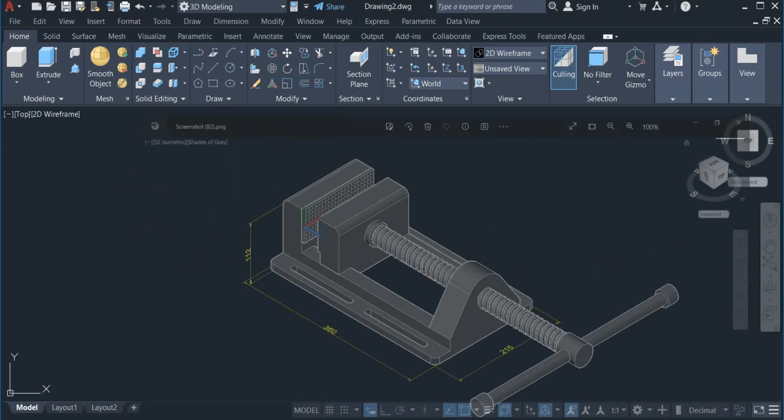Now I'll have to set up my drawing unit first. So I type U and choose units. From the drop down window I'm going to choose the length type, which is decimal, already there. On the precision I'm going to choose 0. The insertion scale I'm going to choose millimeters. On angle type, decimal degrees is already there, then precision 0. So that's going to be okay for this setup.

Click OK. And again I'm going to choose my workspace, and here I'm going to choose 3D modeling workspace, and I'm going to also choose the southeast isometric view.

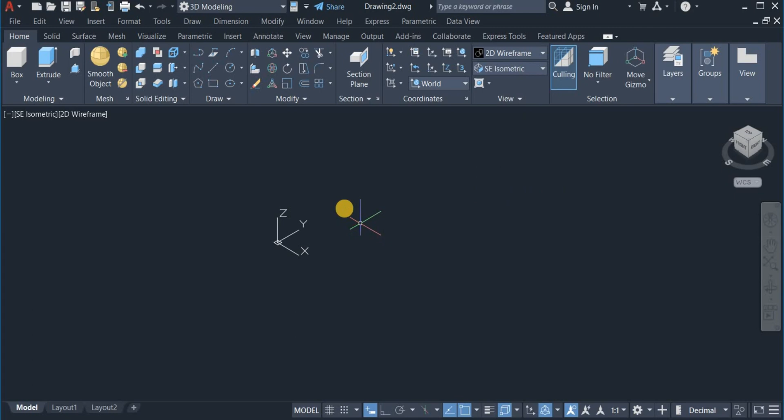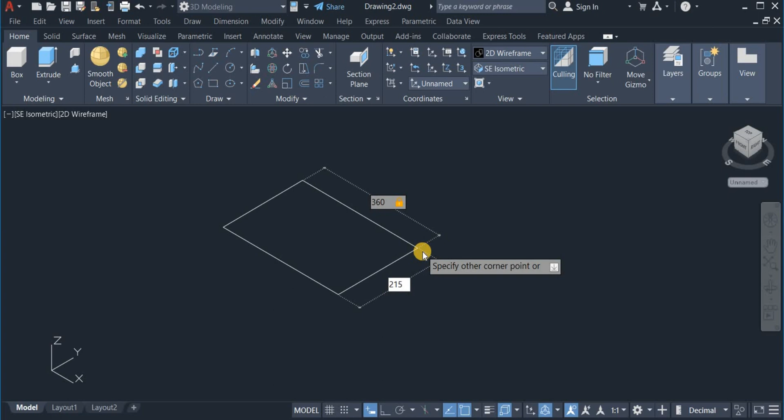Now I'm going to draw a rectangular block of 360 by 215 by 112. Come over here on the draw panel and click on rectangle, then draw a rectangle of length 360, of width 215. Enter. Then I'm going to extrude this to a height of 112.

So this is the rectangular block now.

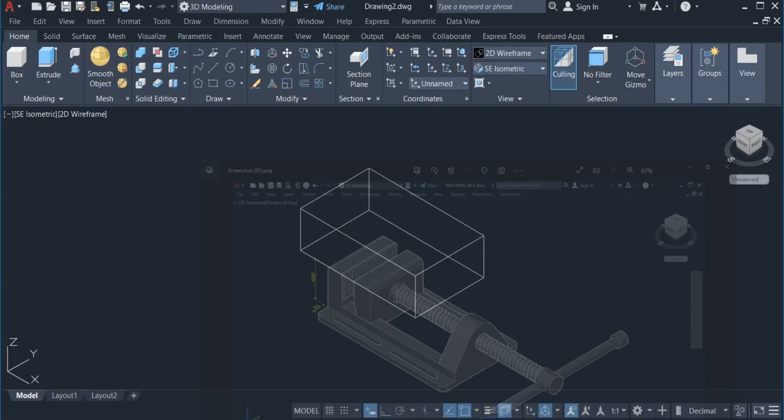I'm going to carve out this portion from the block, 100 by 33 on both sides of this block. So I come right here again. Before I do that, I'm going to extract the edges right here. Click on extract edges, click on this block and enter.

Now they're all in bits, so I can now use the copy command. Click on this line, I move down. I have to check the ortho mode here. Then copy down to a level of 100. Enter.

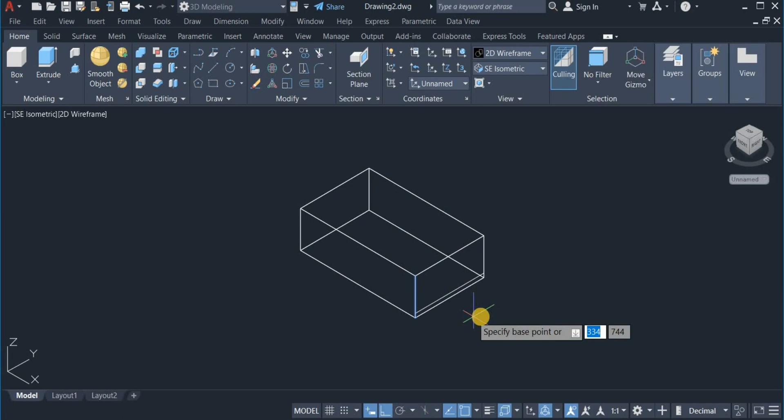I'm going to copy again this 33 to the right, so I right click and choose repeat copy. Then copy this, enter, move 33 to the right. So I'm going to repeat copy again and copy this one as well to the left, 33.

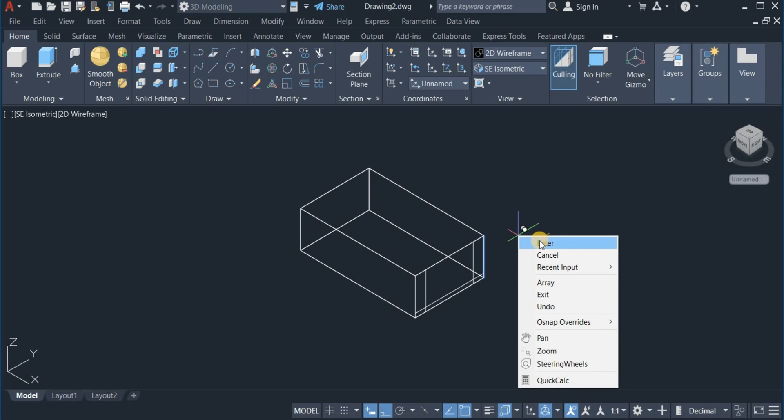Now I'm going to switch to shaded view. Click on this, you can now see the line. I'm going to use the Presspull command to pull out these two edges. Click on this, pull this out. Click on this and pull this out. Alright, so I'm going to click on this.

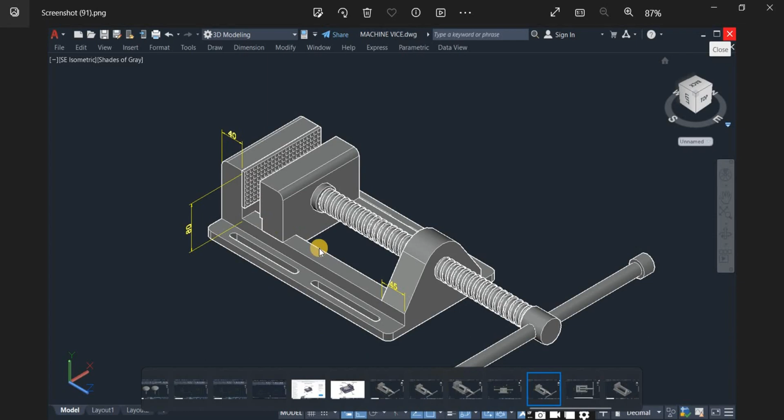That is done. Again, I'm going to cut out this portion from the block. Erase this, okay I'll bring this block right here. Now I'm going to cut out this portion too. From here to here is 40, this is 46, and the height is 80.

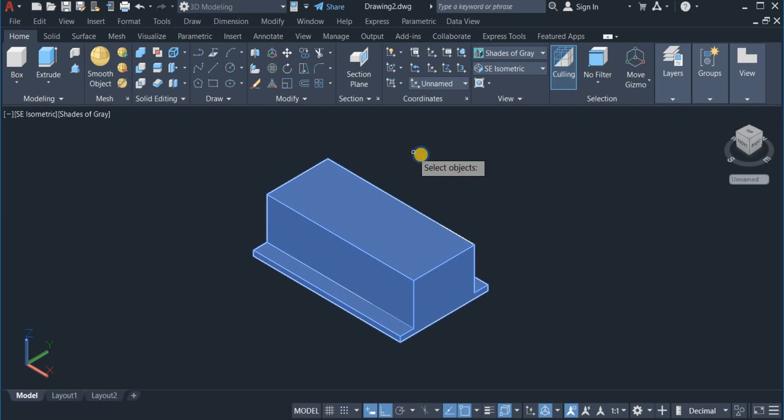So I'm going to extract the edges again. Click on this and click extract edges. Alright, that is done. Go to 2D wireframe.

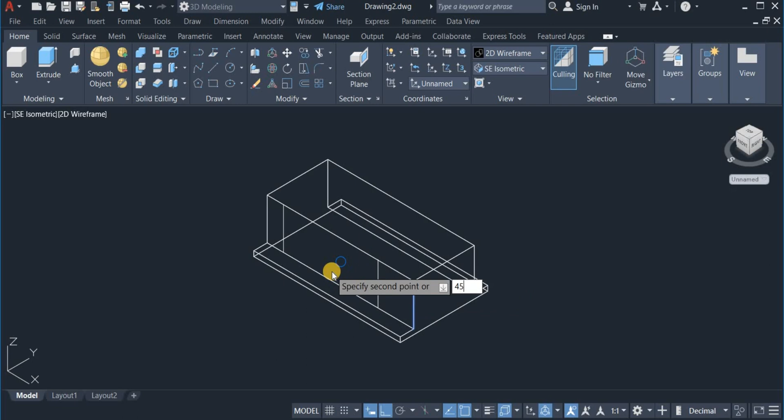Now I'm going to copy this very edge to a length of 40. Enter. Then repeat copy again and copy this edge, 45. Enter.

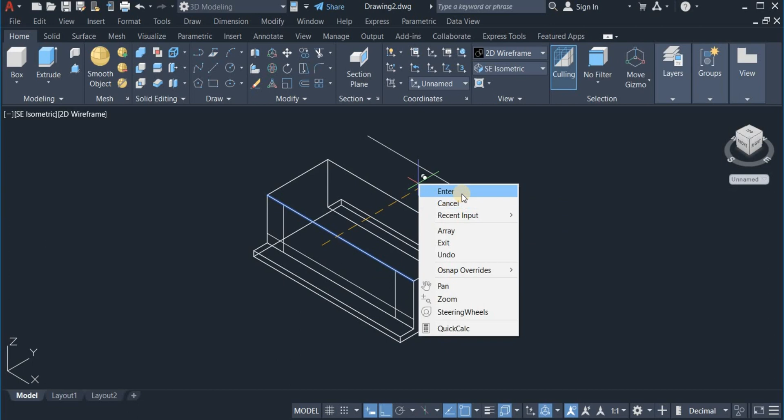Now copy down again to 80. Copy this very line again, move it down to 80 downwards. Okay, that is done. Now let's view the shaded form again. Click on this. Now with the Presspull command again, I'm going to pull out this very edge, this very portion, pull it out. Okay, so that is done.

Now again, I'm going to move this block aside and erase this. Move this one closer again, move here. Right, so the next thing I'm going to do now is to create this hollow portion of it, and this is 100 right in the middle.

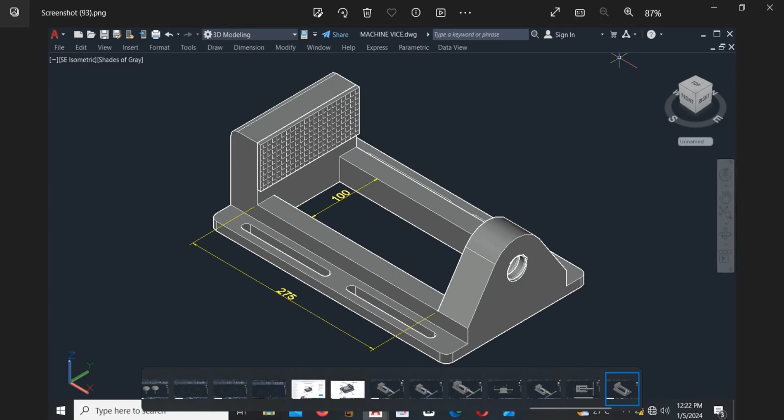So what I'm going to do here is switch to the wireframe again, then draw a straight line from here to this portion. Then use the offset command and offset this line by 50.

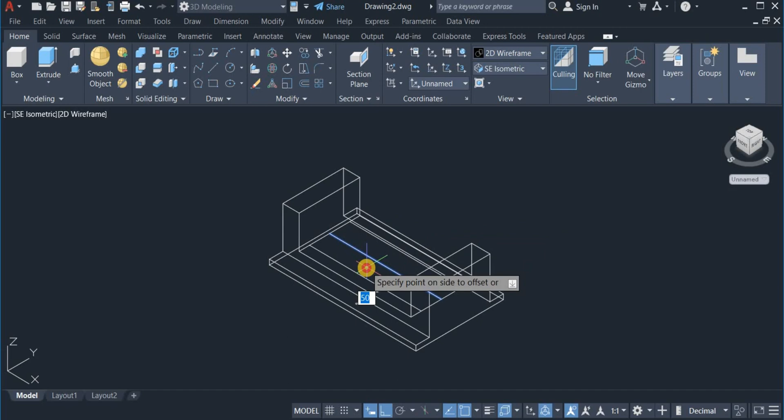Offset this by 50 to the right, 50 again to the left. Okay, then erase this.

I'm going to switch again to Shades of Gray. Now use the presspull command again to pull out this very portion. Okay, so that is done.

The next thing I'm going to do now is create these slots. I'm going to draw a line of 40 from this end here, then another 16 mm line inwards to get the center of this circle. So I'm going to draw a line of 40 to the left, then another 16 into the right to get the center of this circle.

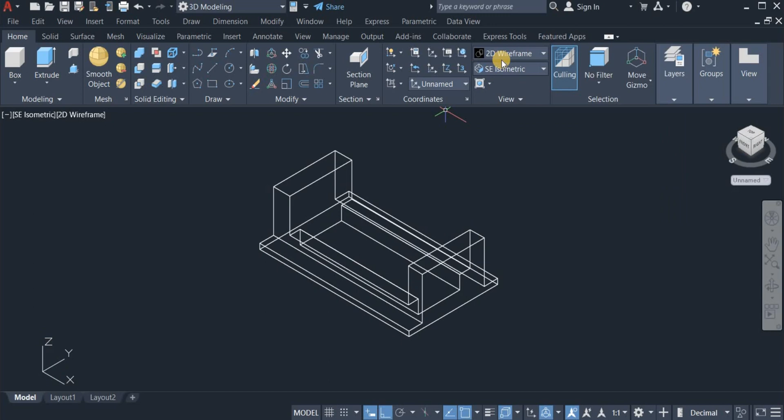Again, I'm going to extract the edges of this block, this drawing. So I click on extract edges and click on this. Now it is extracted. Now I'm going to move on to 2D wireframe.

Here I'm going to draw a line, or rather copy. Click copy, copy this 40. Enter. Right click again and repeat copy. This time it's going to be 16. Copy 16 to the right, 16. Okay, click enter.

So here is the center of this first circle. Now the center of the second circle is 120 apart, so I'm going to draw another line of 120 from here to this point. I'm going to use the copy command again, copy this line 120 to the left, 120.

The next I'm going to draw a circle of radius 6 or diameter 12, that is this and this. Okay, these are the two centers of the circle. So I click on circle command here, click on circle and draw the first circle here, diameter 12. Draw the second circle here of diameter 12.

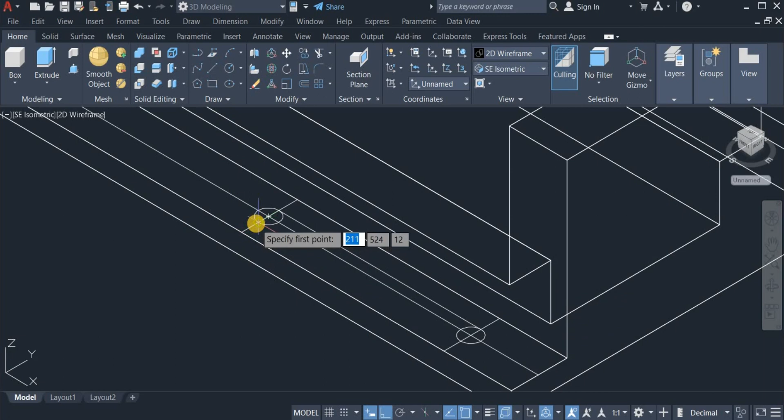Now I will draw a line from this point to this point. Enter. Draw the second line from this point to this point. Now with the trim command, I'm going to remove some of the geometry that is not needed here. I'm going to trim off this and this. Also trim off this, this.

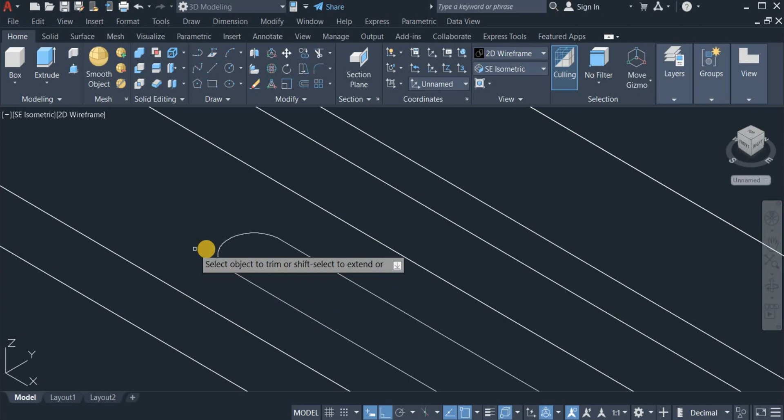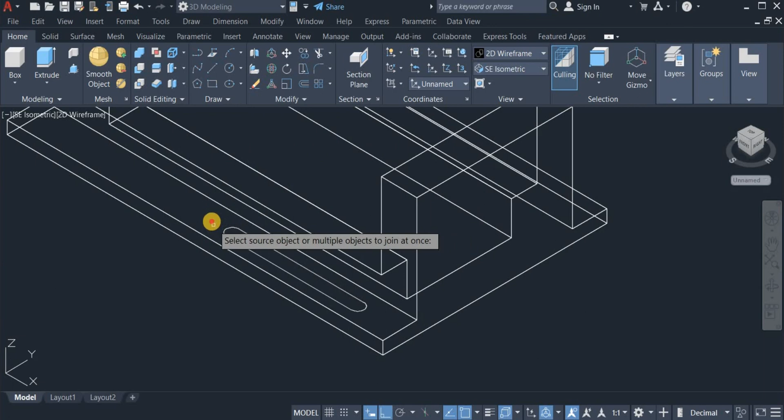Now I will use the join command to join the curves and the straight lines, which is this. Use the join command to join this. Okay, so you can now have just one.

Now I'm going to use the mirror command to mirror this to the other side. So I click on modify panel and choose mirror again. Choose the mirror command. Click on this. Locate this midpoint here and mirror to the left.

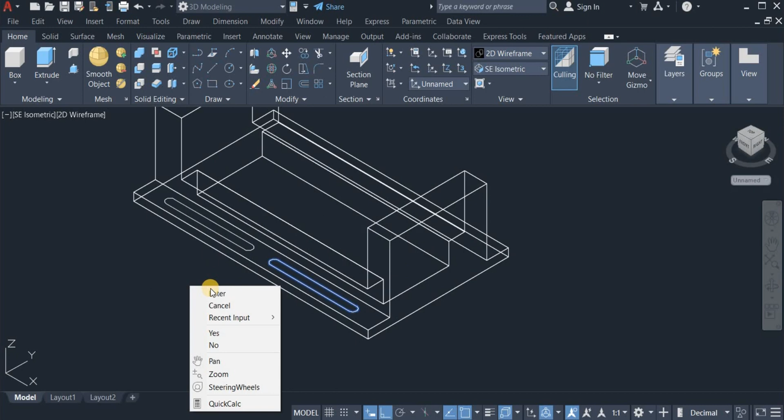Enter. Okay, so I'm now going to mirror these two slots again to the right. So I click on mirror again and now select these two. Now choose here as a midpoint and mirror to the right.

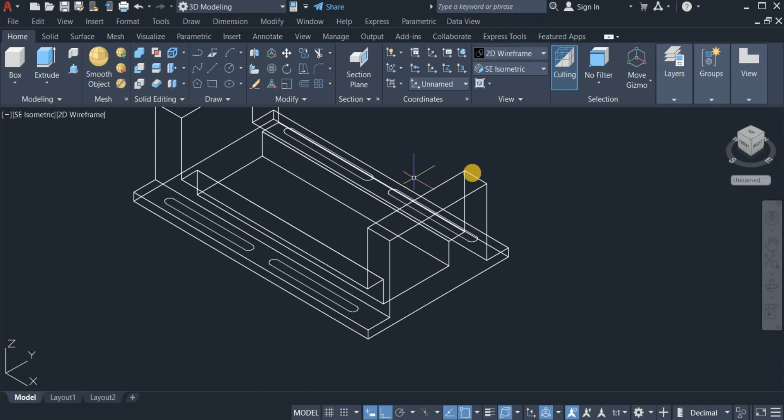Okay, that's done. So I'm going to move to shaded view again. Click on this. Alright, I will now use the press pull command to pull out these slots. Click on this, pull it out, pull this out. Okay, move it around.

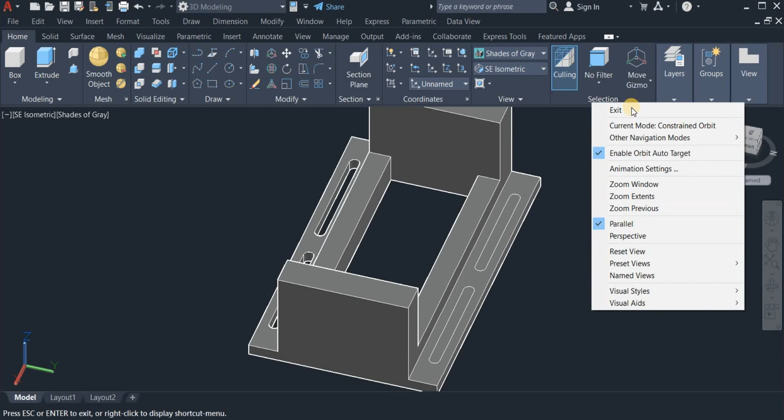Now pull this out as well, then pull this one out. Okay, return again to SE isometric. Alright, okay, I've now done all the slots.

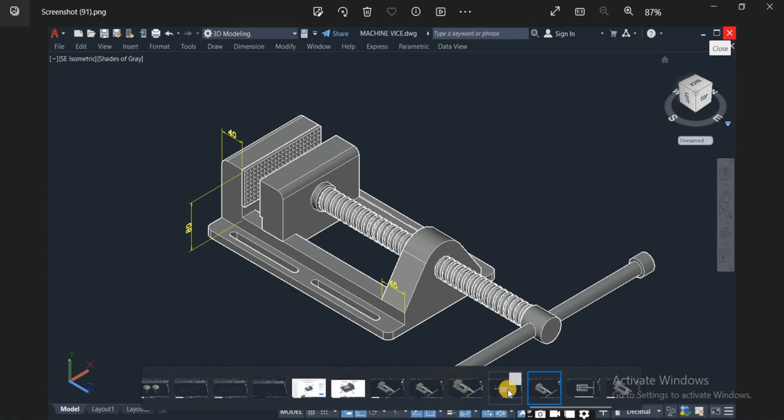Now the next thing I'll do is cut out this portion of the vise, and from the drawing you can see the radius of this is 40 and the distance from the base to this point is 32.

So here I'm going to draw a straight line from here as a midpoint, draw a line of 40 down, right, then here again copy this line 32 upwards, click this and move it up by 32.

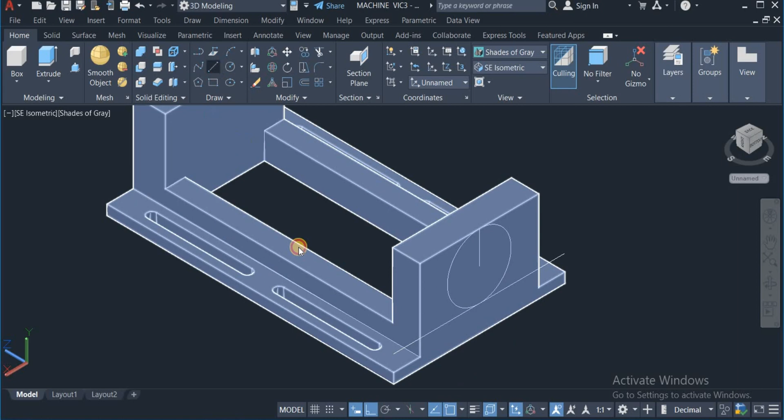Right, now I'm going to draw a circle here of 40. So I click on circle command. Now draw a circle with here as center and terminate it here. Okay, again I'm now going to draw a line from this intersection.

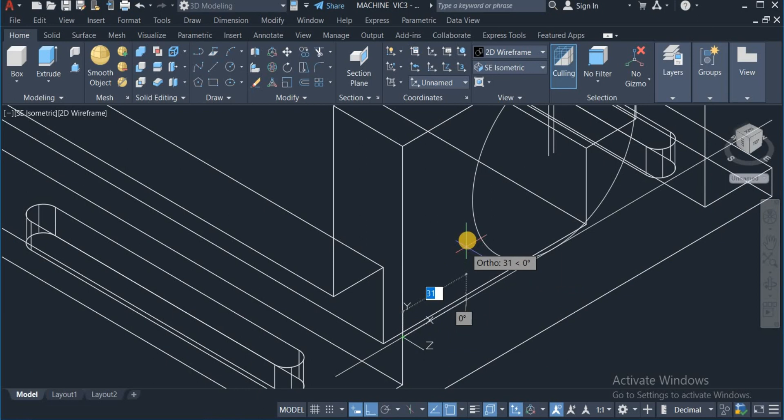I'm going to switch to 2D wireframe. Okay, I'm going to draw a line from this point to the tangent point of this circle. So I hold down the Control key, right click and choose tangent and locate the tangent point of this circle, which is here. Enter. Then do the same thing here, draw a line at this point.

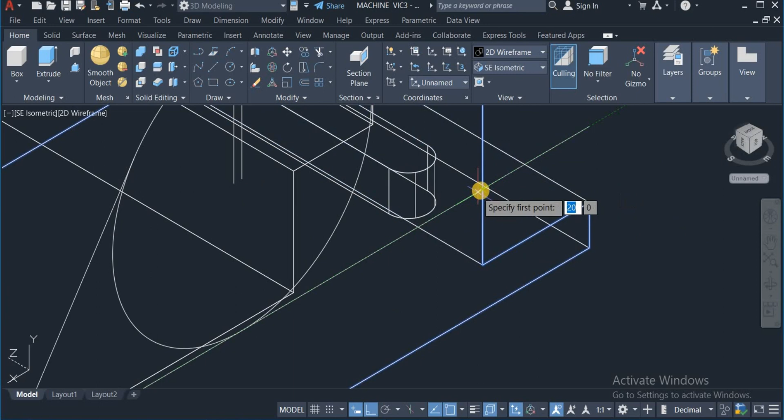Hold down the Control key, right click and choose tangent. Then locate the tangent point on this circle. Okay, so that is done.

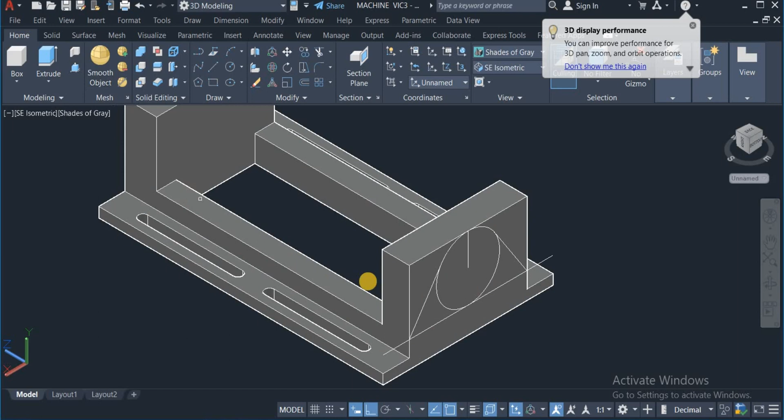Now I'm going to view the shaded side of it again. Okay, so with the press pull command, I'm going to pull out these two edges, pull this out as well.

So I'm going to draw another circle from the origin point of diameter 25. Now with the press pull command again. Now before that, I have to also erase this line. I'm going to erase this line.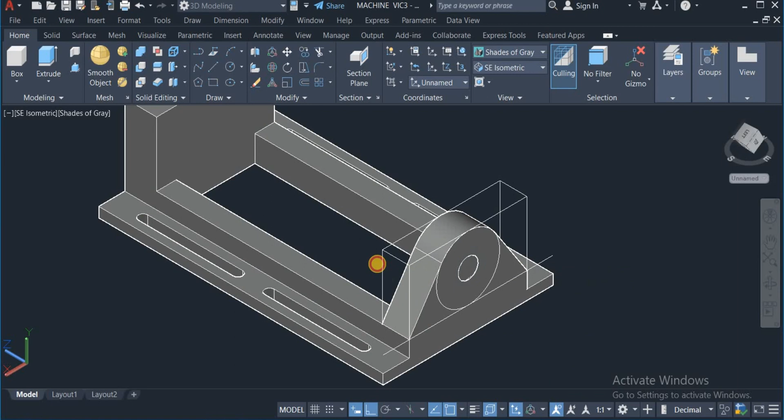Erase this. Okay, now use the press pull to pull this out. Now I'm going to move the whole of this out and wipe off the construction lines. I'm going to clean off all this. Erase it. Okay, so this is done now.

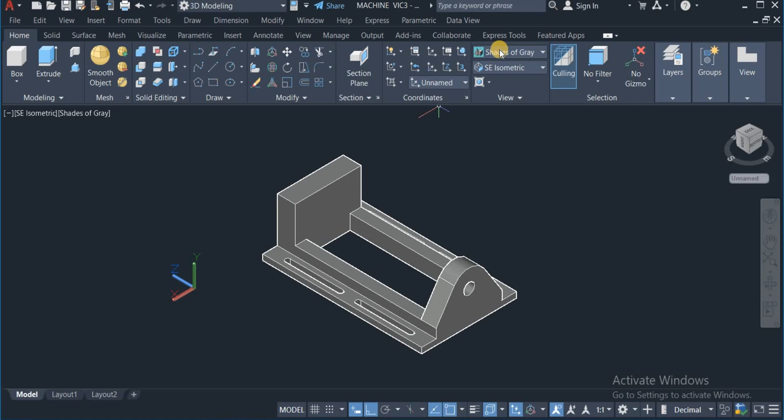So next I'm going to copy the edges of this fixture out. I'm going to move down to 2D wireframe. Now copy this out, copy these edges. Before that, I have to extract the edges. Extract the edges. Okay, now copy the edges out.

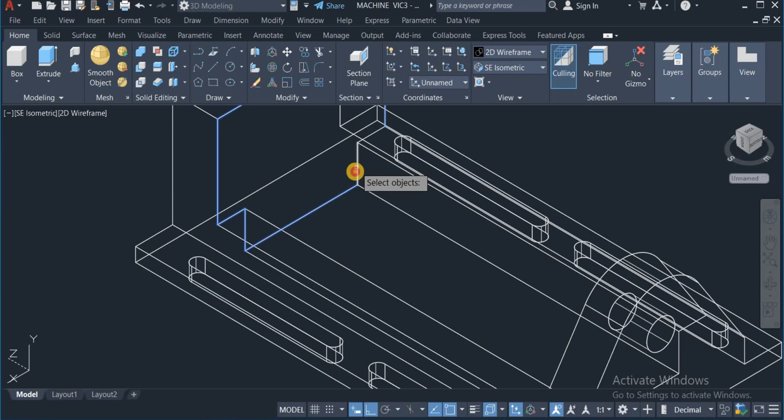Copy this, this, copy this, this, this, this, and this. Enter. Then move it out here. Let me uncheck the auto mode. Okay, so this, enter.

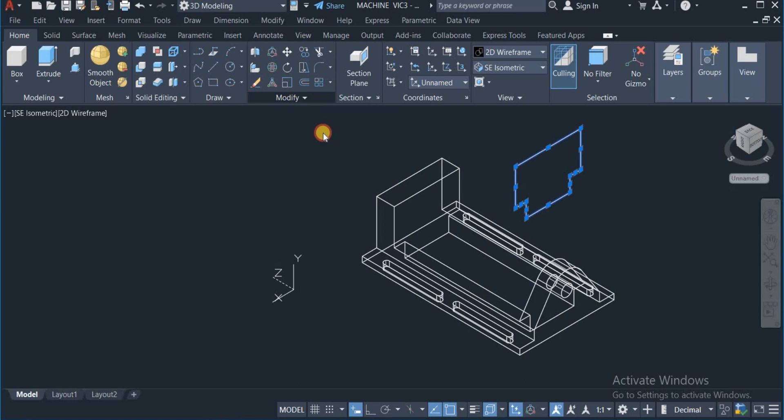Now I'm going to use the join command to join it. Click here and click join. Okay, so now I have one geometry, right?

Now I'm going to also extrude or press pull this to a thickness of 45. So I can just click on this, click here, and enter 45. That's the thickness of the movable jaw.

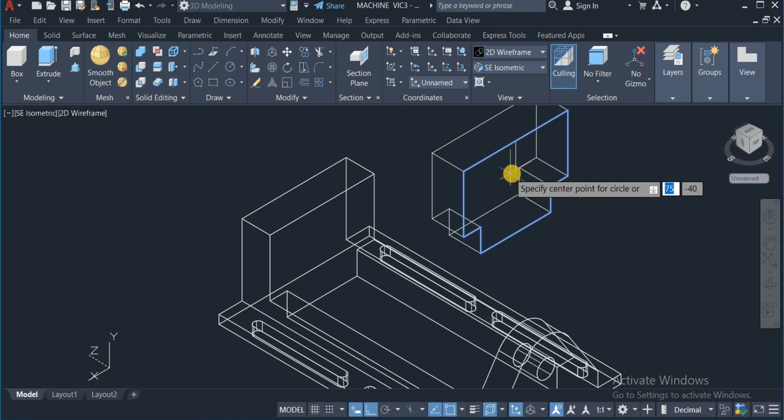Click on line and draw a line from this midpoint. Check the auto mode and draw a line downwards of 40 to locate the center. Okay, now I'm going to draw a circle of diameter 35. So I click on diameter and choose 35.

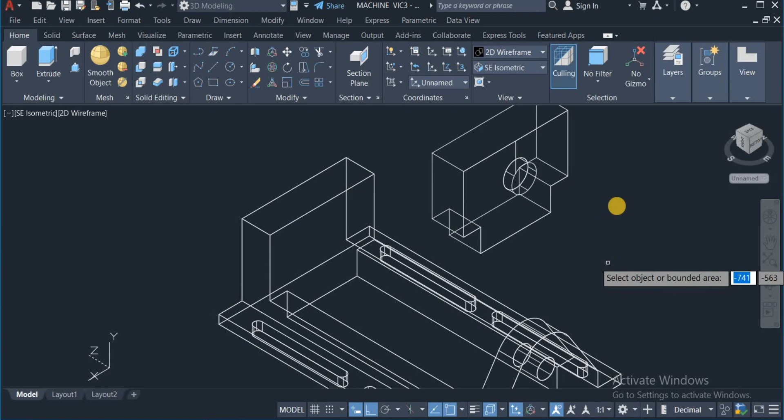Okay, now extrude this again, or press pull or extrude to a thickness of 12. Okay, that's done.

Okay, that's that. Now next I'm going to create the threaded shaft, and the length of that shaft I'm going to make 400. I'm going to make the thickness 25, so I'm going to draw a circle of 25 here, diameter 25.

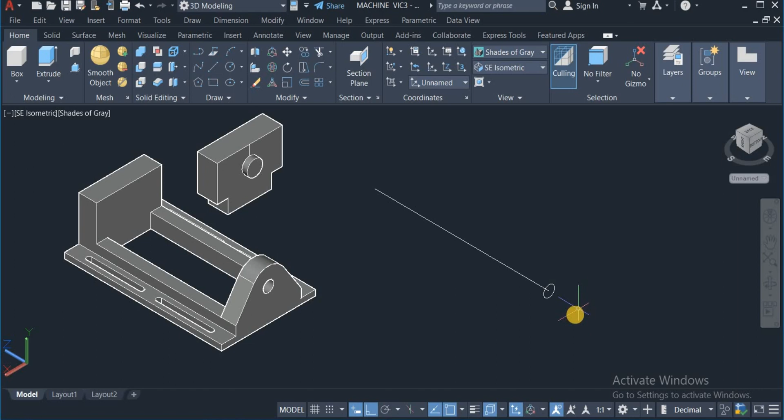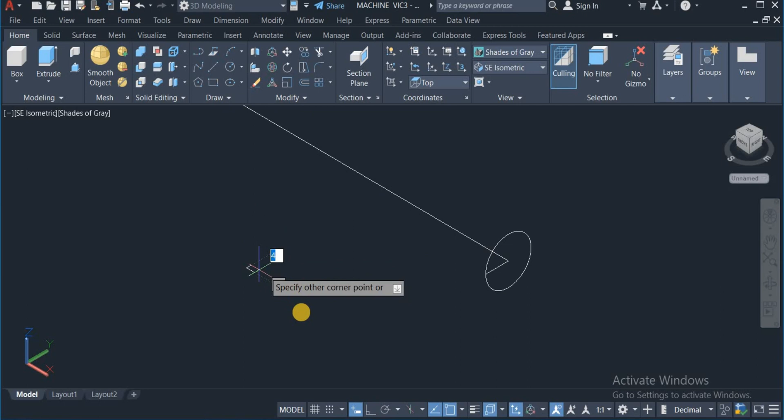Right, okay, so I'm now going to create a thread, and I'm going to use the Helix command to do that. So first I'll draw a line to touch this portion. Now I'm going to also draw the thread profile, and here I'm going to use the rectangle command to do that. Click on rectangle and draw a square, now I have to switch the UCS to top to do that. Okay, so I now click on the rectangle command and draw a square of 4 by 4.

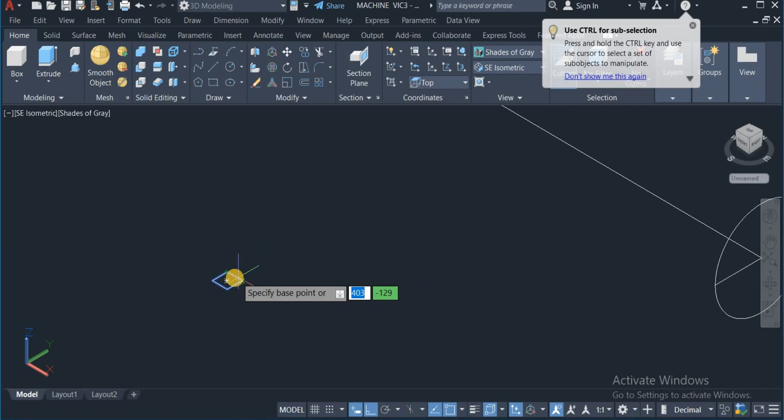Okay, I'm going to move the square. Click on move the square, pick it up from this very point. Okay, and place it here. Alright, now I'm going to create a thread now.

So I click on draw panel and choose Helix. Okay, zoom in. This is the center of the Helix. Okay, I'm going to switch the UCS again, switch it to left. Switch the UCS to left. Okay, so click on the draw command again and choose Helix.

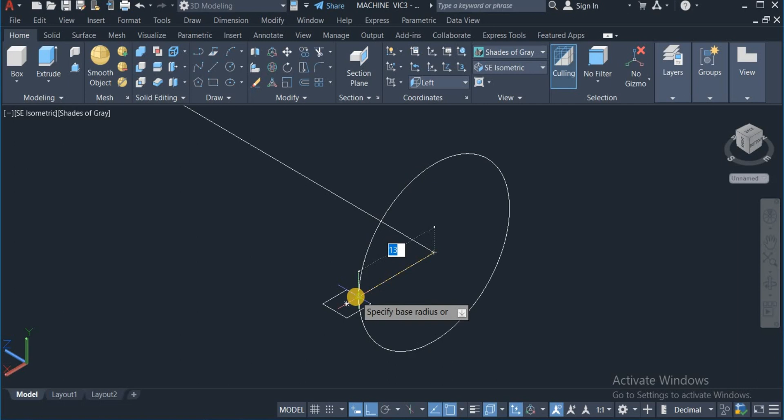That is the center of the helix. That's the... click on the base radius, which is this, and also the top radius, the same point.

Okay, now number of turns, I'm going to make it 32, so I'm going to right click and choose turns and enter 32. Okay, now this is the length. Now terminate it here. Right.

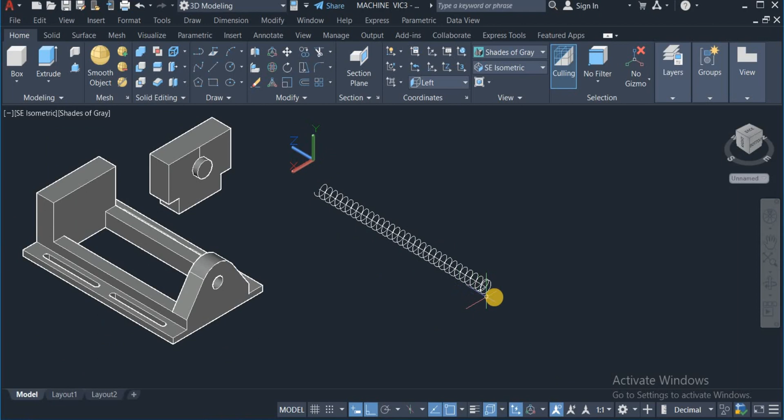Okay, next I'm going to now create a thread. So this is a thread profile. I'm going to use the sweep command to do that. Click on and choose sweep. This is what I'm going to sweep.

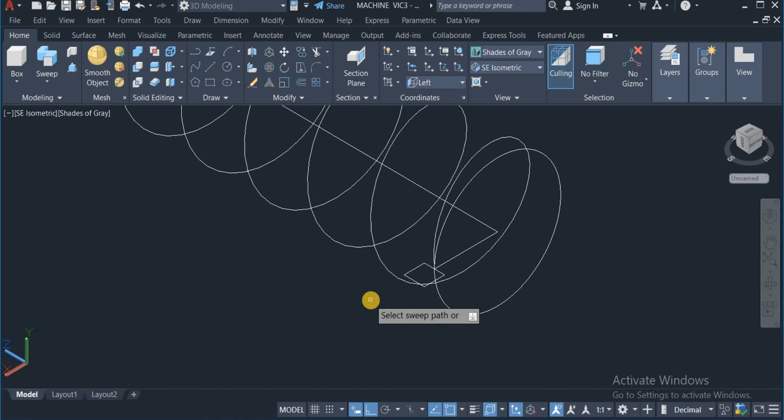It's a square thread, enter, and choose path. This is the sweep path, helix. Okay, so that's the sweep path.

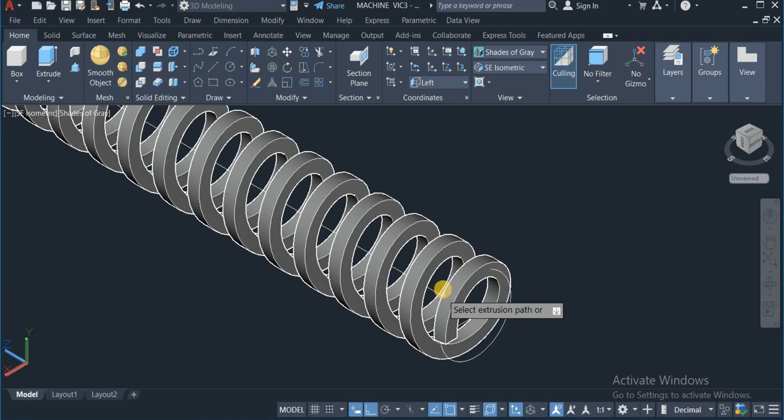Okay, now I'm going to also extrude this very circle. Extrude this circle. Click extrude. Extrude this circle. Enter. Then choose path. Now this is the path I'm going to. Okay, so that is done.

So with the union command, I'm going to unite the thread and the shaft. Okay, so that is done.

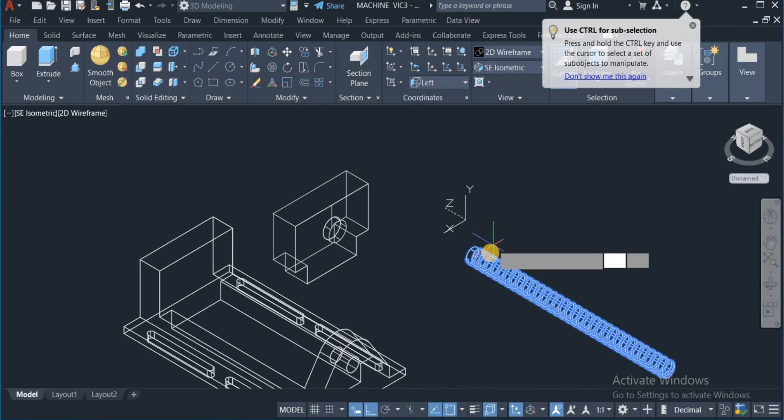So I'm now going to move this one. I'm going to move this now. Move this. Pick it from this center, which is here. Then drop it right at the center. Locate this center, second center, right? And drop it here. Okay, so that's done.

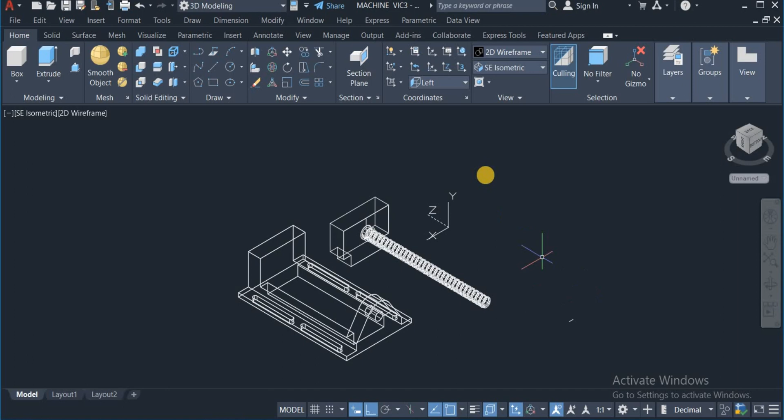Now I'm going to draw the handle. That's done. Let's view the shaded view again. Okay, so that's that. Now I'm going to draw this handle.

I'm going to draw this handle, and the length of this handle is 300. Also this very short piece here. So move here again, I'm going to draw the handle. Clean this. And the length of the handle, I'm going to make it 300. 300 length. 300. Right.

And draw a circle again from this very point. Now I'm going to change the UCS position now. Click to front. Click to front. Right, so I'm going to draw a circle now, a circle of diameter 2.

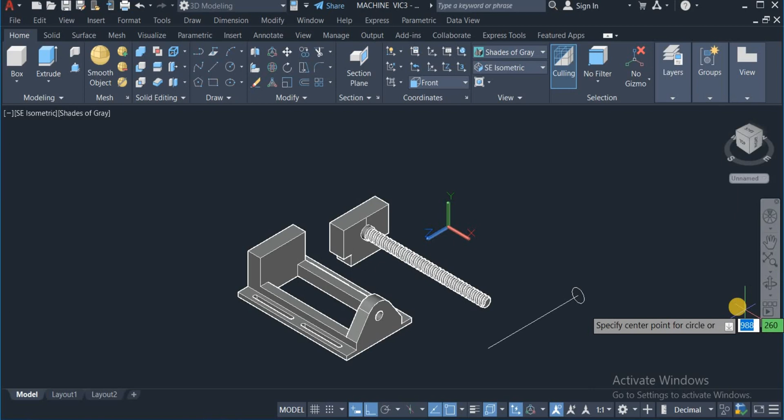Diameter 20. Draw another circle again of diameter 25.

Okay, now I'm going to copy these two again. Pick it from the center and drop it here.

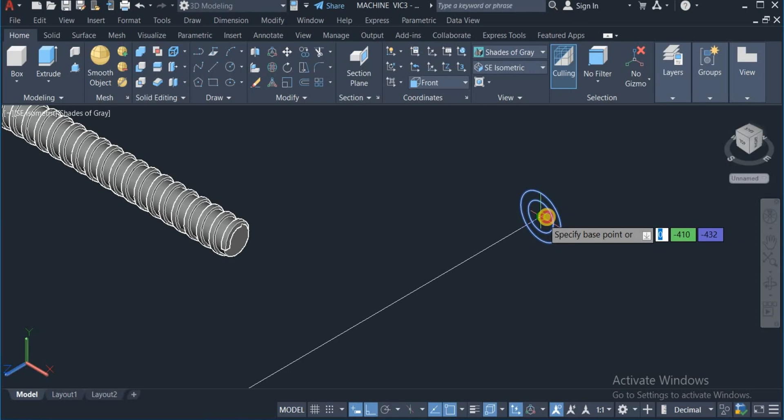Fine. Now I'm going to extrude this. Extrude this bigger one, make it 20. Extrude this other end again, make it 20.

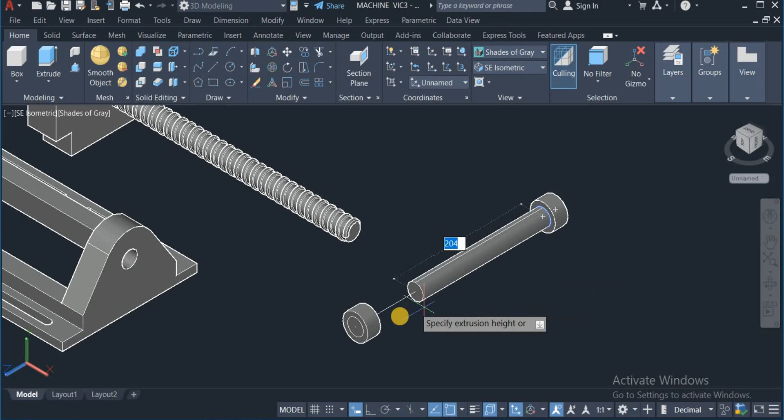Now extrude this very one again, or I'll press pull this. So that's the handle. Now I'm also going to create yet another circle. This time I'm going to change the UCS to left.

So I click on left and draw another circle. Okay, so I'm going to draw another circle of diameter 40. Click on circle, diameter 40. Okay, and extrude again to a length of 40.

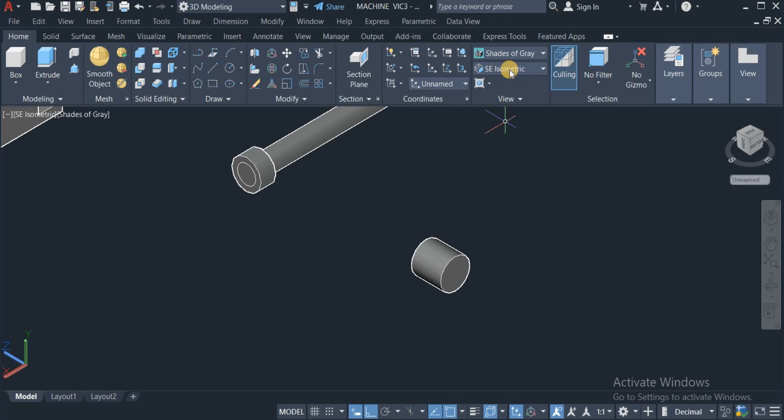Okay. Now I have to locate the center of this. Click on, draw a line from the center to the second center.

Okay. Now I'm going to copy this or move this and pick it from the very center, the center of this object, and drop it at the center of this.

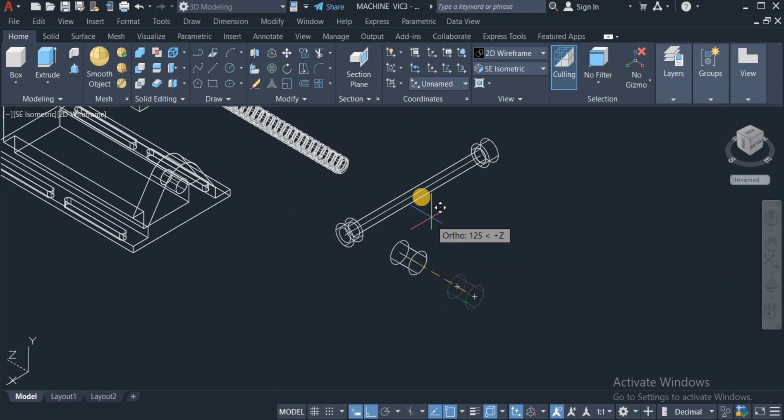Okay. Now with the union command, I'm going to unite all the objects here.

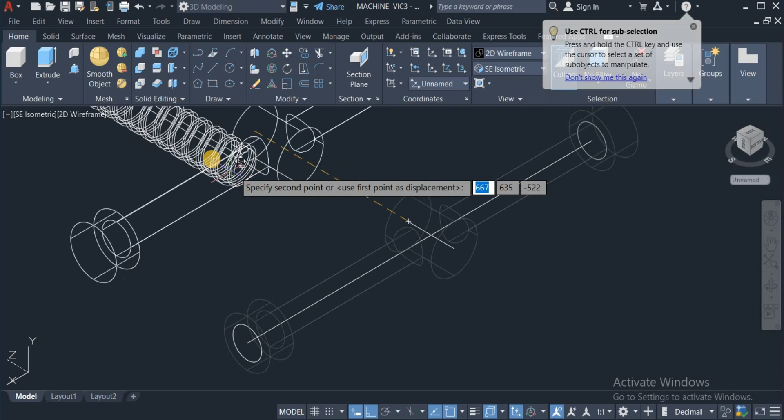Right. Okay, I'm now going to move the whole of this and pick it from this very center and drop it at this center. Drop it at the center.

Okay. I'm going to clean up this and this. Erase. Okay, so let's now view the shaded view.

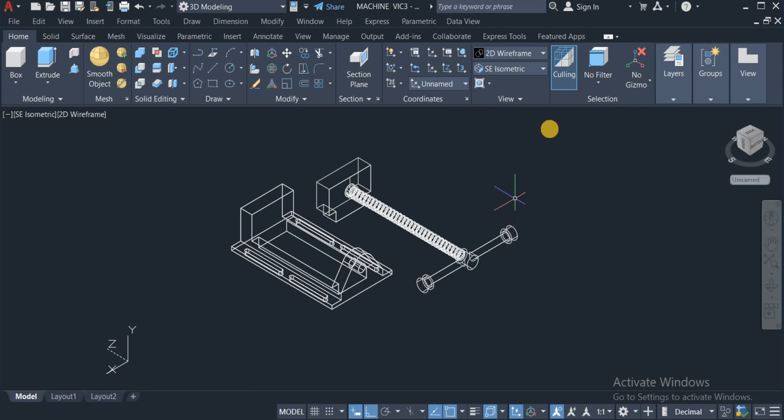Okay, so this is the movable jaw, this is the threaded shaft, and this is the handle.

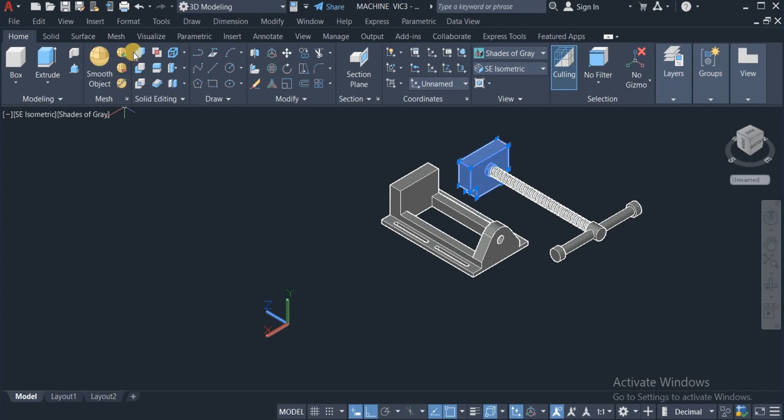With the union command, I'm going to unite these. Okay. Also this, unite them all. This and this. Okay, so with the move command, I'm going to move the whole of this, pick it from the very point,

and drop it right here. Right here. Okay.

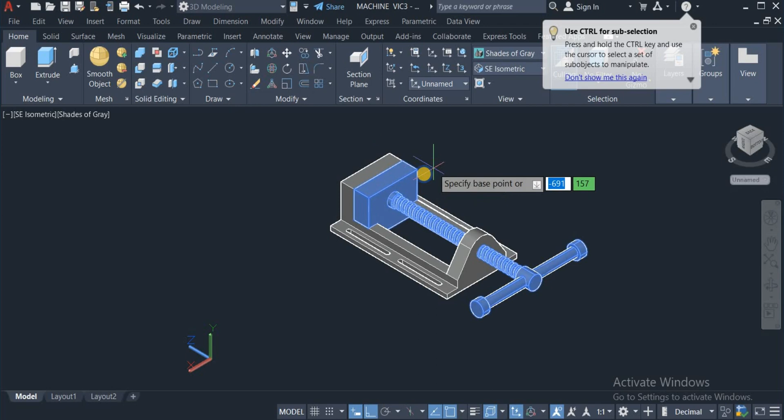Right, so this is the movable jaw. Let's see how that moves. Click on this. You can see that it's sliding. You can slide it in whichever direction you want, and terminate it there. Okay, so that's that.

Now I'm going to create the fillets on these very edges. So I'm going to use the fillet command to do that, but this time use the fillet edge. So I click on the fillet edge and choose the radius.

I'm going to choose the radius of 12. Right click and choose radius. Enter. Okay, let's put 10 as radius. Now radius this portion.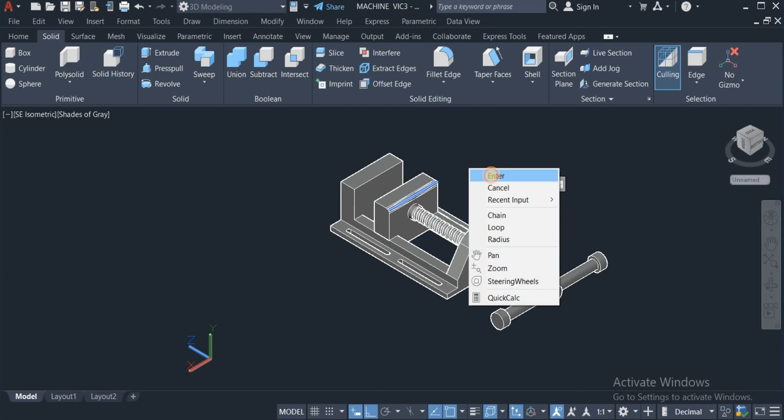Enter. Okay, I'm going to repeat radius this portion as well. Click enter. Okay, I'm going to radius these edges too.

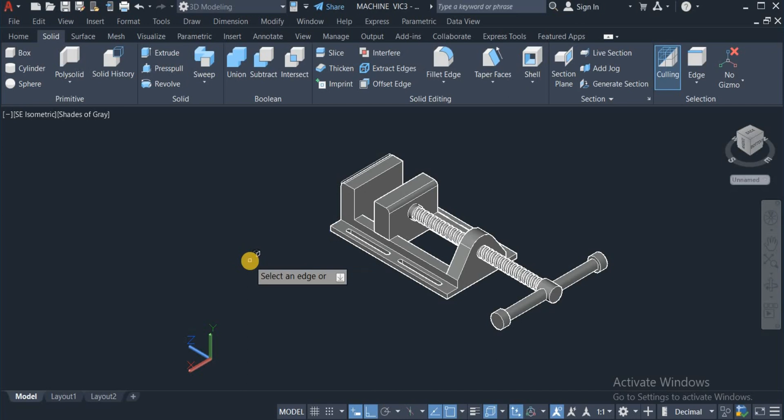Just to fillet these very edges. So this time I'm going to make it small. I'm going to change the radius to 5. Let's make it 5. Okay, completed.

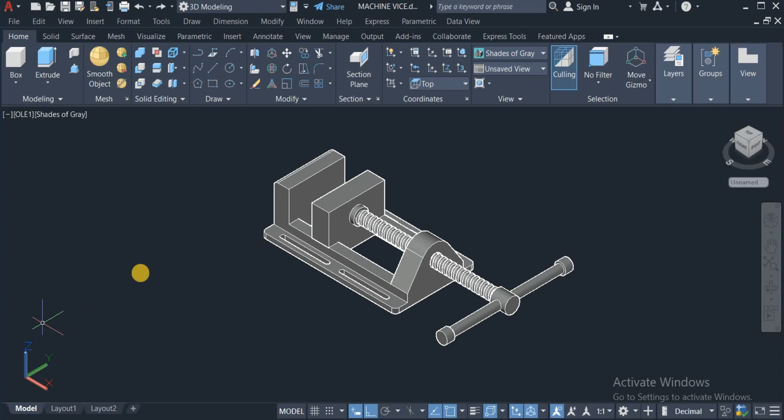Okay, next I'm going to draw the serrated grips. I'm going to draw this serrated part. So here I'm going to use the rectangle command to do that, and I have to switch the UCS to the left. Okay, I'll now draw a rectangle of 149 by 60.

Okay, so this is it. Now I'm going to use the hatch command to create the serration. So I click on this and choose hatch. Click on the hatch command.

I want to select this internal area to apply the hatch. Okay. Now enter.

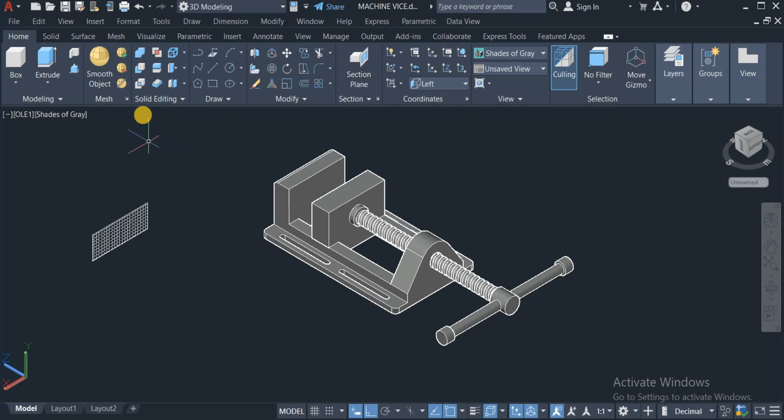Again, I'm going to extrude this to a thickness of 5. Click on 5 and enter.

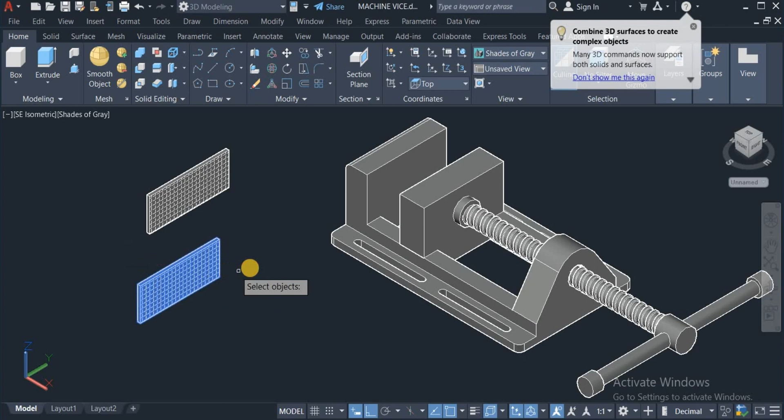Okay, so I'm going to make a copy of this and rotate it. A copy here. I'm going to rotate one. Okay, I'm going to use the union command to unite this. Enter. Union command again to unite this. Enter. Now I'm going to rotate this.

Click on this. Right click and click on rotate. Choose here. Okay. So I'll move the whole of this one now.

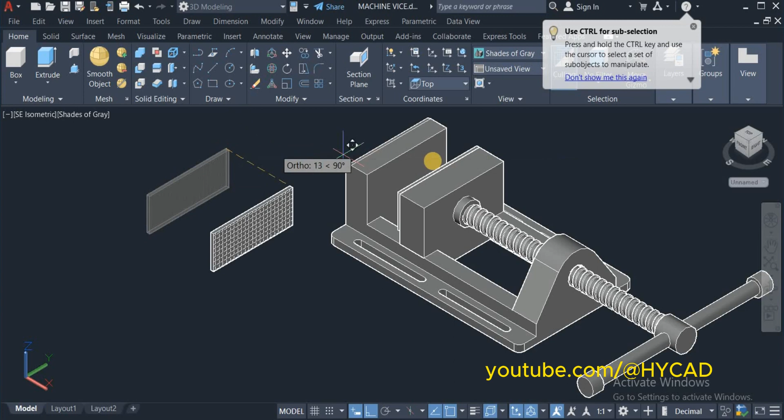Move this unit and pick it from this end and drop it here. Okay. Now move this again and pick it from the very end and drop it here. Okay, so that is done.

Now with the fillet edge command, I'm going to fillet the edges of this very sliding jaw. So move on to the solid toolbar and click on fillet edge. Now here I'm going to choose the radius and make it 12. Then fillet this very portion. Click enter and enter. Okay.

So this is complete now. That is the jaw. This is the machine vise fully assembled.